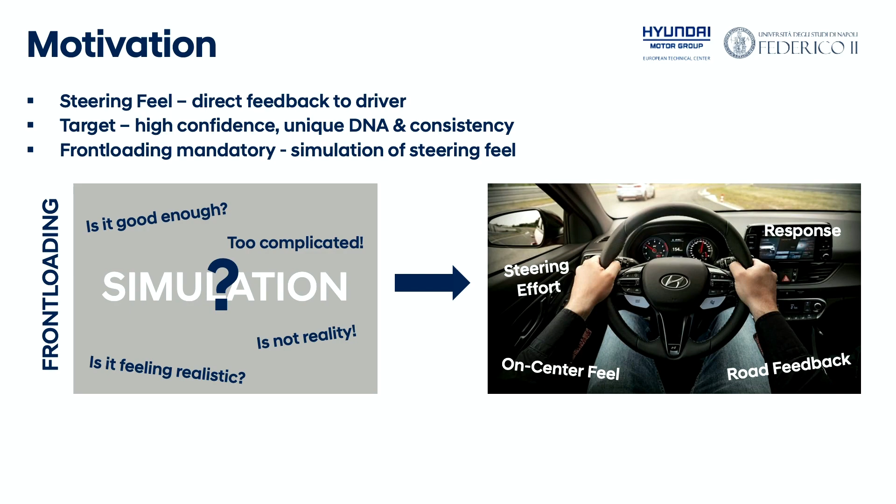Why use simulation? Well, we have been here for 2 days now, and we have heard about front-loading activities regarding tuning of the car, regarding suspension, kinematics, and compliance. Steering feel is definitely influenced by that, and therefore is something that is done at the very late stage of the development process. Now, in Hyundai, we are doing already what I said, and we wanted now to front-load this activity as well. The problem is that not so many people believe in simulation, and especially on steering feel, this is quite complicated. And therefore, our research question: how can we represent the steering feel in the virtual environment using a model in the loop approach?

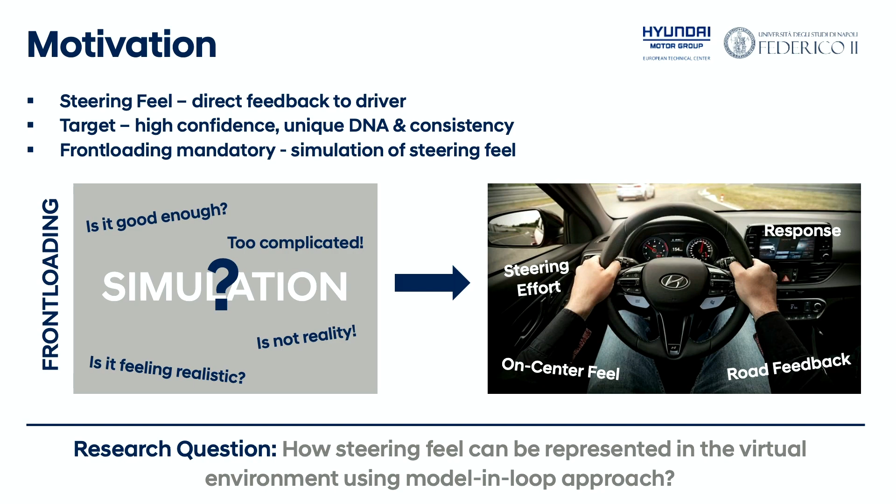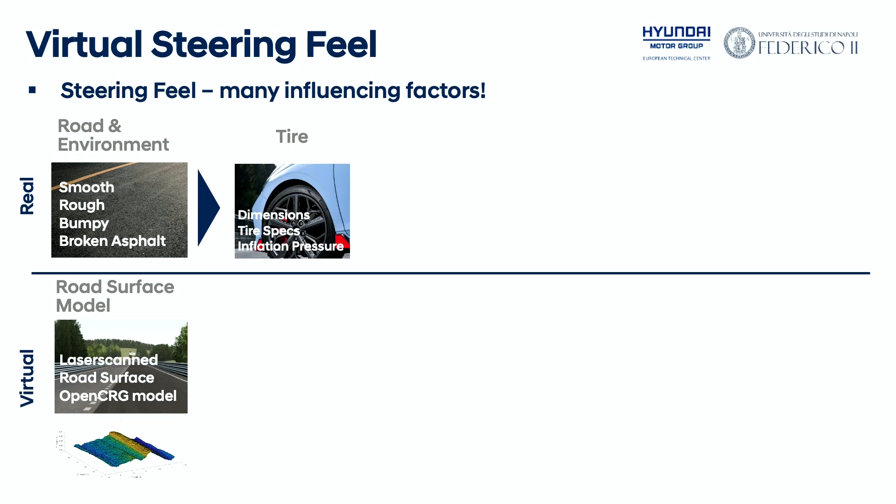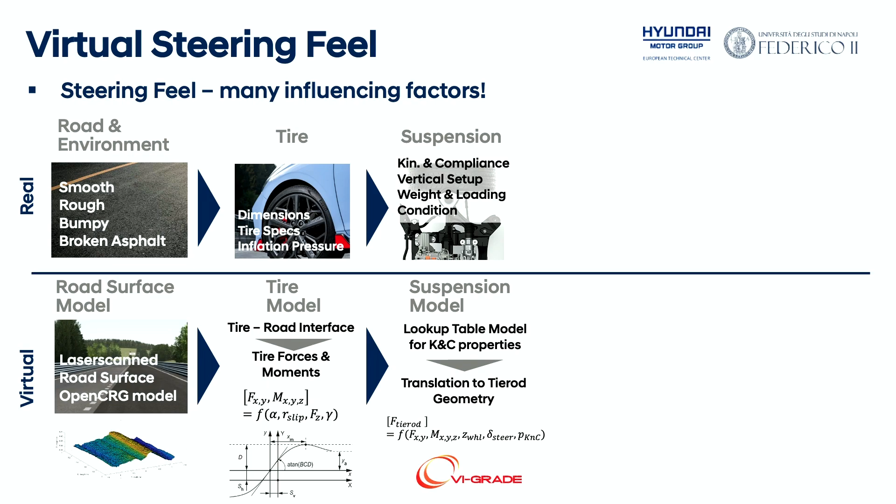Now, virtual steering feel. We have many influencing factors in the real world and in the virtual world. We have the road, of course, which can be different, smooth, rough, and in the virtual world, we usually laser scan in order to have an exact representation of them. Then we have the tire, different dimensions, different tire specs during the development process, and usually we have different tire models as well. Suspension, as I said, is already influencing the steering feel quite massively, and for vehicle models like VI-CarRealTime, we have lookup tables for the K and C properties.

Then we have the steering system, very high stiffness, very low damping, and definitely one of the few components that always has a control, at least here in Europe, which is the EPS. And then regarding the steering model, we have quite a complicated model. Usually, it's multi-degrees of freedom, and the EPS is represented only by the assist curve.

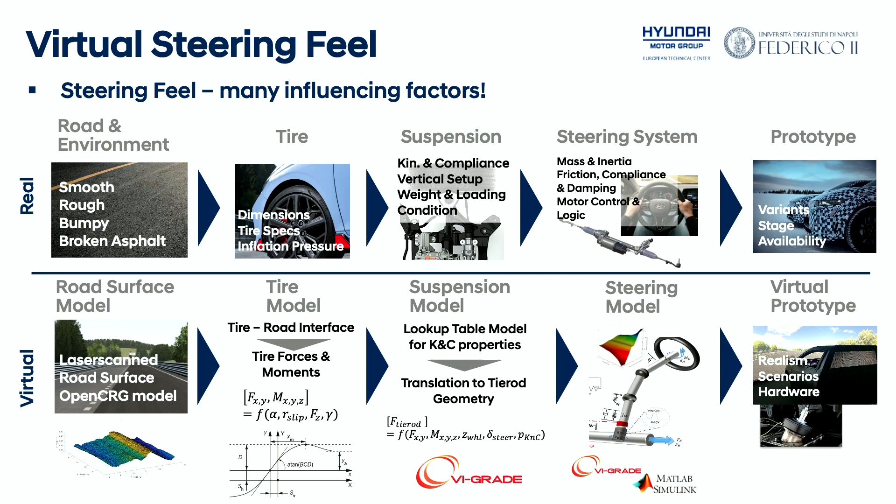Then the prototypes, not always available, in different variants at different stages, and our virtual prototypes that instead are always available. But then what is important is to give a realistic scenario and hardware that can give a correct feedback to the driver as well. And talking about the virtual testing environment, when we do subjective evaluation in HMETC, we use our static driving simulator.

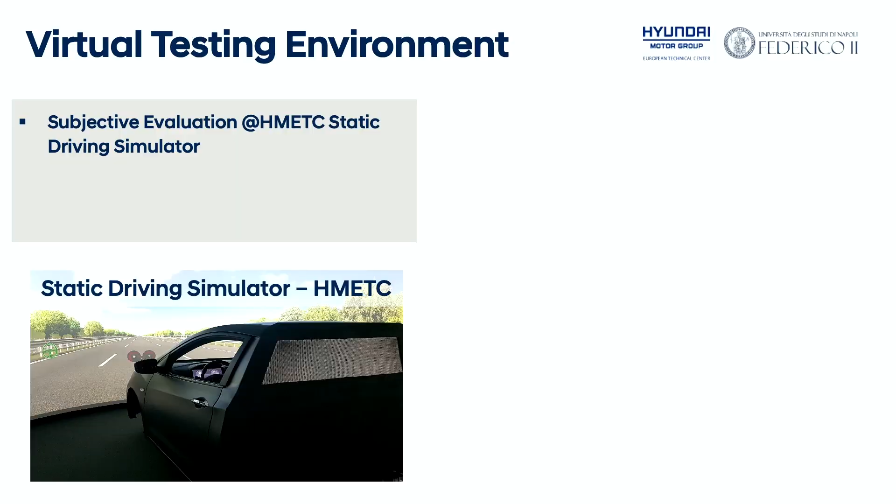The steering feedback loop: we have a hardware and a virtual part. The hardware is real, and we have the OE steering wheel and column, and we have the feedback torque actuator connected to the lower column connection to give the feedback torque that the driver should experience.

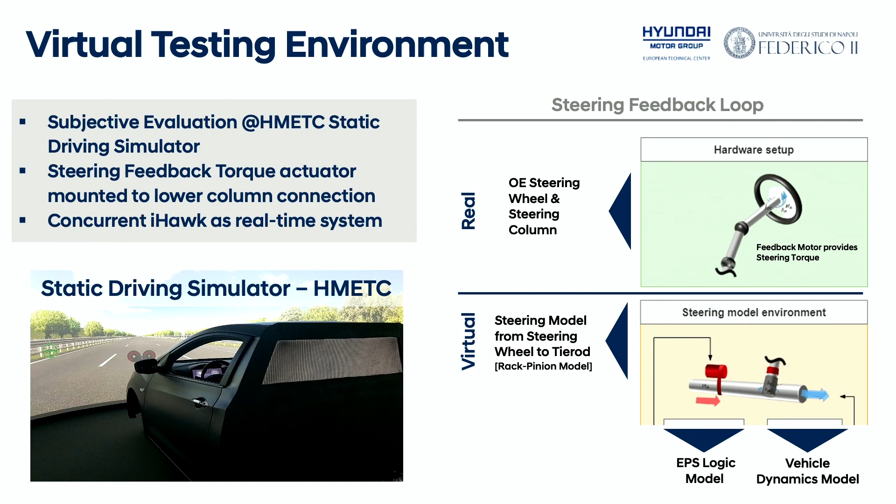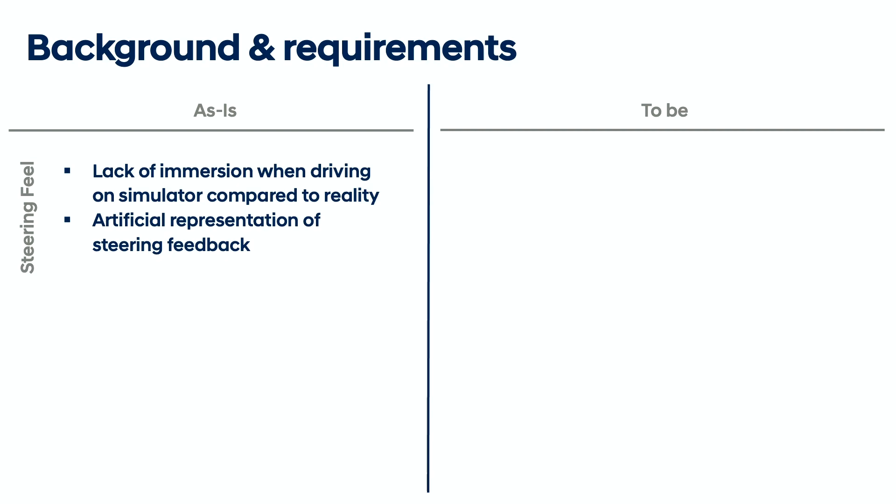I'm Francesco, and I will show you my work that I did with HYUNDAI on the EPS logic development. I will start by showing you the requirements and the background I found in HYUNDAI when I started working with them. The first thing is that there was a lack of immersion when driving, caused by the artificial representation of the steering feedback that they had before.

So we had as a requirement an improvement, to have a better immersion, especially for the drivers when they had to do evaluation of each kind of vehicle dynamics maneuvers, both for handling and ride. So what we had before in terms of steering wheel, does it work? Yes.

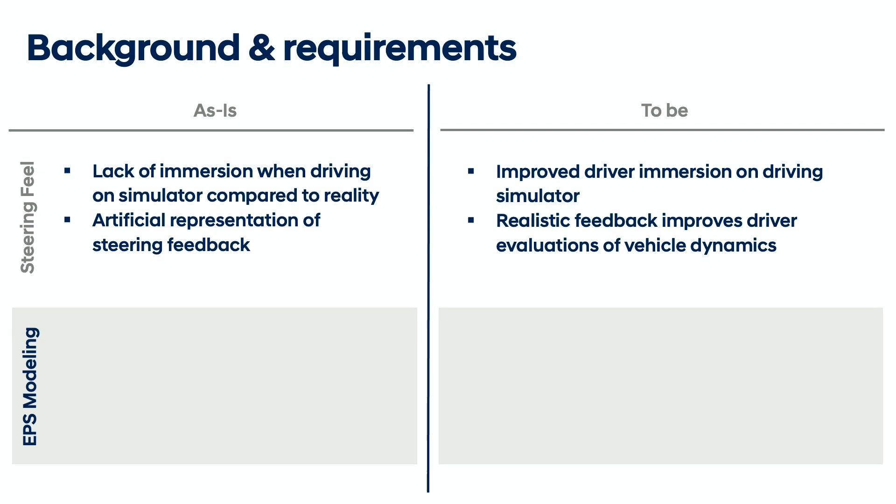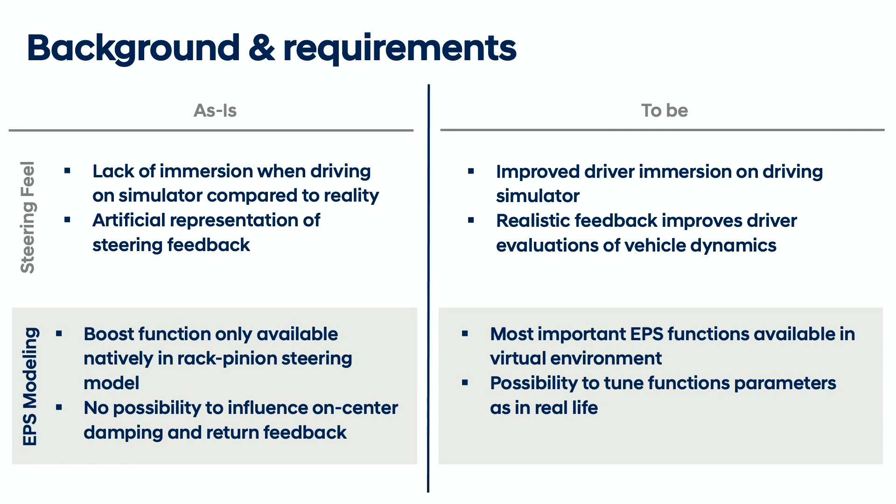What we wanted to achieve with my work was to have all the most important EPS functions you can find on real cars available in a virtual environment, with the possibility to tune them in the virtual environment. So we started from the simple lookup table, a simple assist function, and then we added other functions on top of that. The first one was the damping control function.

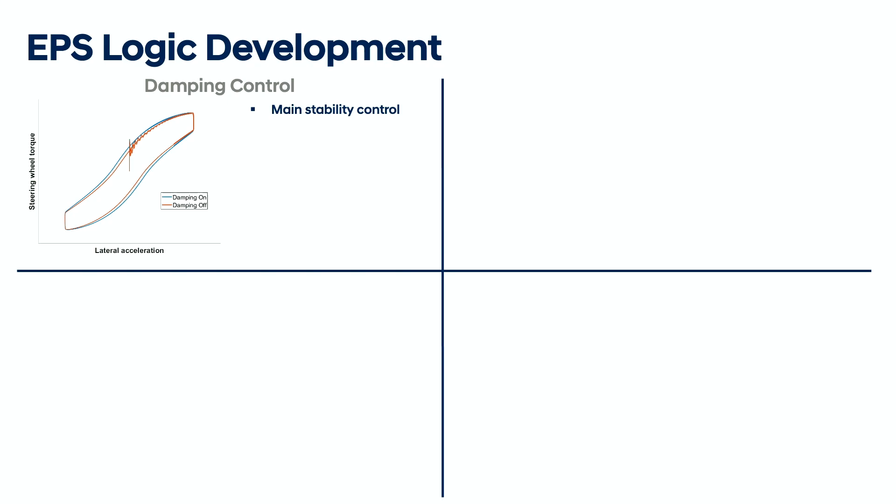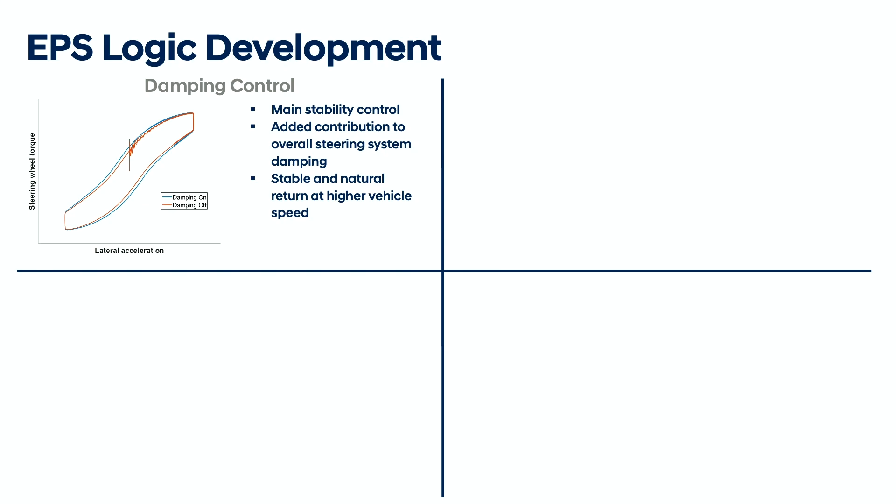That is the main way to stabilize the system without changing the damping of the system itself. Basically it just adds a contribution to the overall damping of the system. That also gives a better feeling to the driver when it comes to the return, especially at higher vehicle speeds. But the downside of having this function is that you have more hysteresis overall in the model.

For that reason, we have an on-center control function that improves the on-center by aiding the driver in the more dynamic maneuvers and by compensating the EPS motor inertia that is present in the mechanical model and the overall level of friction of the mechanical model. As I said before, it improves the on-center feel.

Then we have a very important function, the active return function, that is used for lower vehicle speeds to have the steering wheel return to the starting position. Without that, you can't have that at lower vehicle speed. And that improves a lot the immersion of the driver, because you feel like in a real car when you have this kind of function.

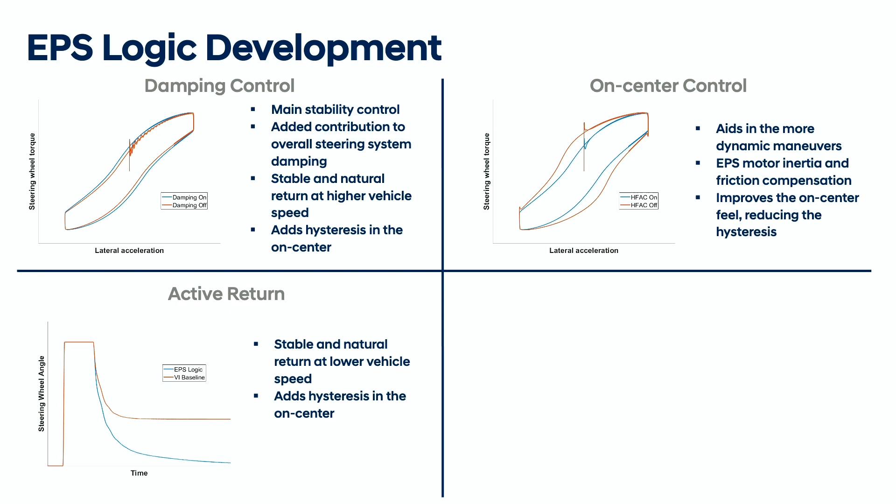But the downside of this function is also that it adds hysteresis in the on-center when driving at lower vehicle speeds. Overall, all the functions put together gave us a better representation of the steering feel compared to the measurement data, and with respect to what we had before with only the native VI implementation, as you can see in the graph.

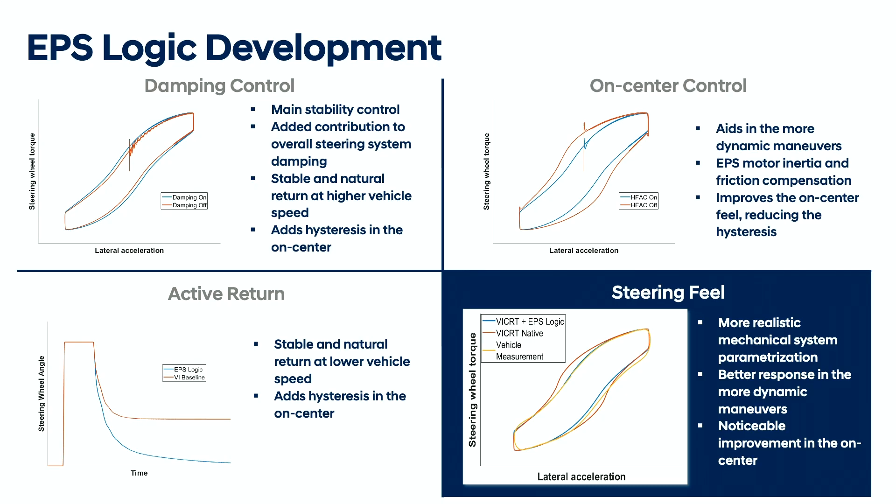That is due to the fact that we can also have a more realistic mechanical parameterization of the model, and we have a better response in the more dynamic maneuvers thanks to those functions. As you can see clearly from the graph, there's a very big improvement in the on-center characteristic of the steering feel.

A big challenge of my work was also the integration in the driver in the loop environment we have at HMETC. As Alessandro explained before, we have a Concurrent machine that runs with the classical SimWorkbench environment. The standard workflow to implement a Simulink model, because I did all my work in Simulink, is to use the ML toolkit to compile the model.

It's very simple. You can generate the source code from your model and then compile the source code into Linux, and then execute the executable that calls the library and have it interact with the VI-CarRealTime.

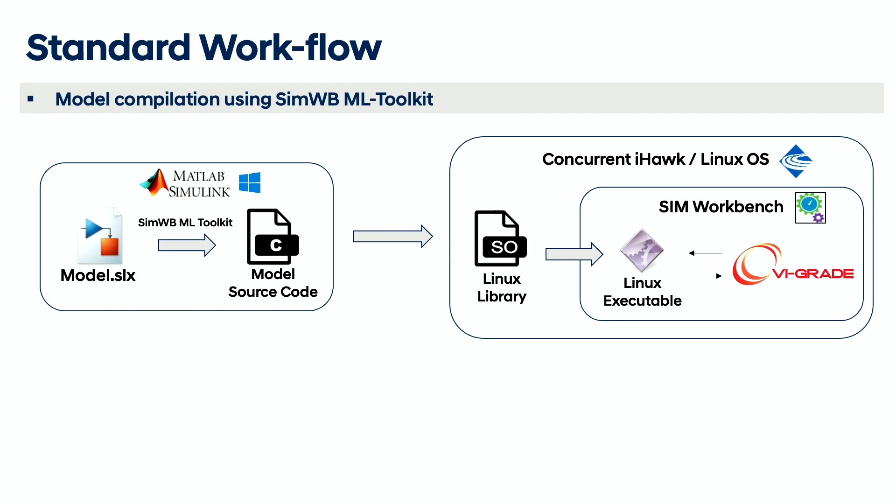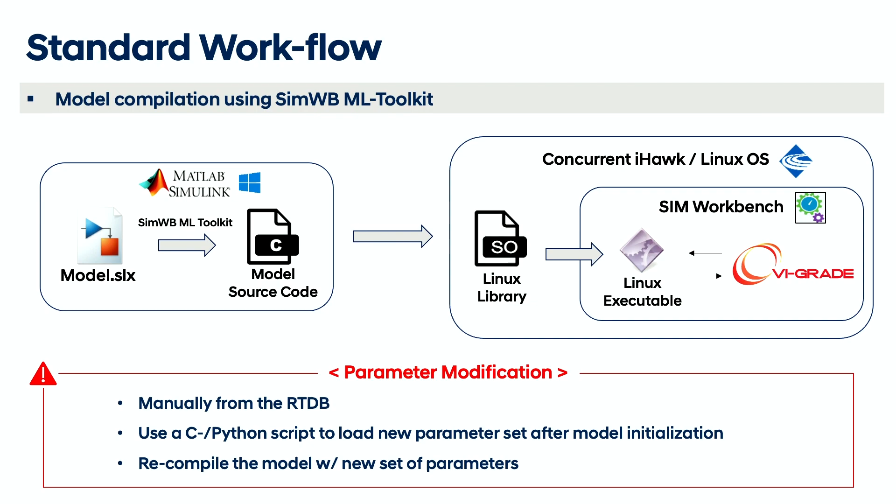But this procedure gives us some problems for all our use cases, because to modify the parameters, if you have different tuning files, with this workflow it's difficult to do. You have to change the parameters manually from the RTDB, or you have to code some scripts in C or in Python to do the parameter change, or you have to compile the model each time with different parameters, so it's not really feasible.

And we had to find other approaches to parameterize the system. The first one was to include an initialization function into the source code of the model.

So we did that by first obtaining with the ML toolkit the model source code. Then we obtained the source code for the initialization function, starting from a MATLAB function through the help of the MATLAB Coder. Then we put it all together, compiled the new library with the inclusion of the initialization function. And that library is able to call an ini file that contains all the parameters and all the settings you need to run the model.

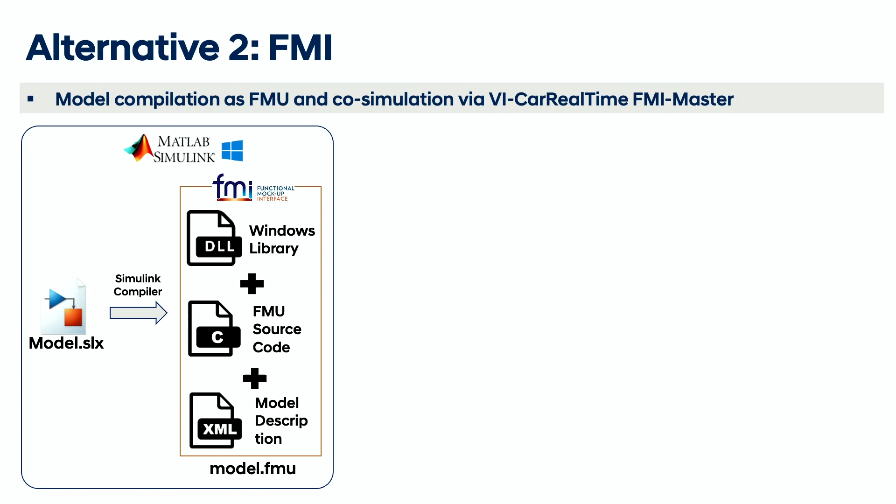And there's no need to recompile the model if you want to change some parameters. You just change them into the ini file, or change the ini file, and you can have new parameters. The other alternative is to use the functional mockup interface. So you compile the model as a Windows FMU at the start, but you have to include the source code for the FMU. Then you can use that source code to compile a new FMU into the Linux environment.

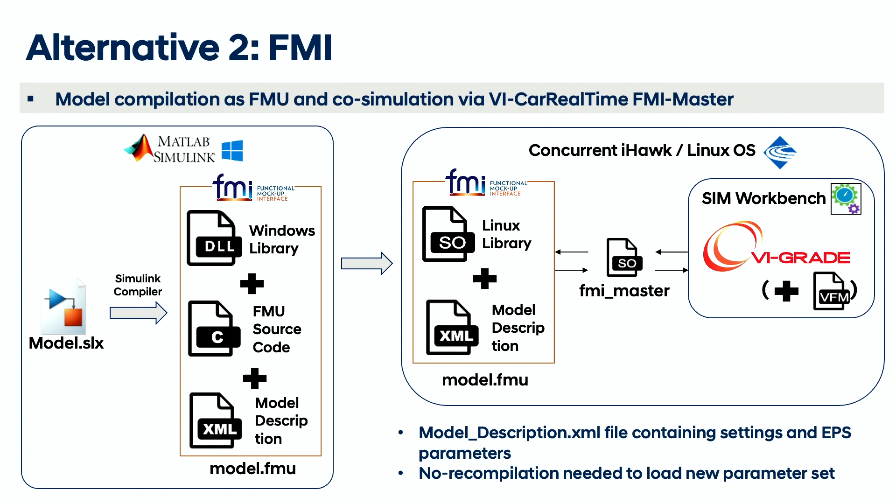And that FMU interacts with the FMI master library from VI-grade that is able to access in real time the model description file, where all the parameters are stored for the EPS logic. And so even with this approach, you don't need to recompile the FMU each time if you want to change the parameter. You just change the model description file.

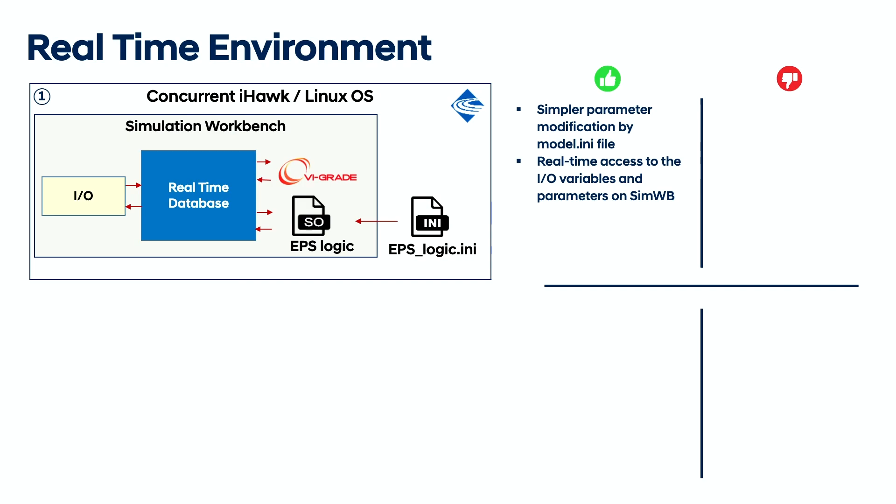So to compare quickly the two environments, to understand which method is better for each use case, we compare the final environments that the two approaches give us. So the first approach gives us this kind of environment where, as an upside, we have a simple way to change the parameters through the help of the ini file. And also, this way, we have real-time access to all the input-output variables and also all the parameters on SimWorkbench with the real-time database.

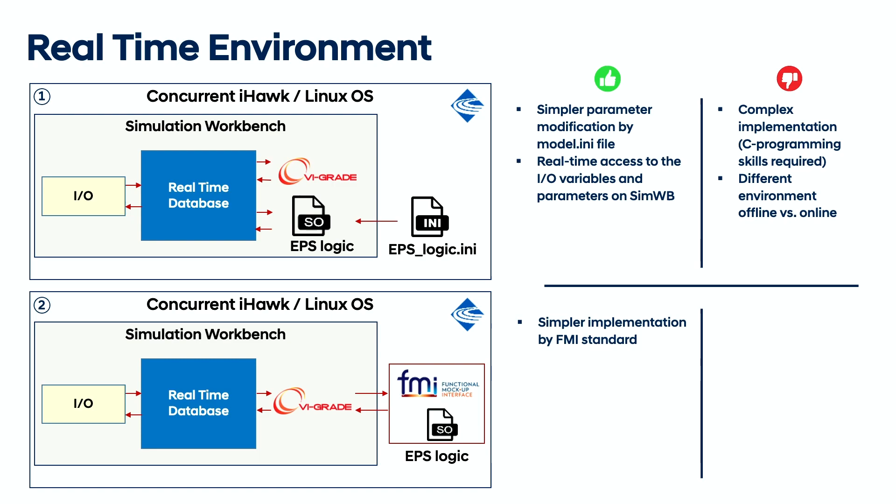But the problem of this approach is that it's more complex to implement. You need some programming skills to do that. And also, the environment you have is a bit different to the one you have with the offline simulation. With the other approach, the one with the FMI, you have a simpler implementation. You don't need to do much coding to implement the model this way.

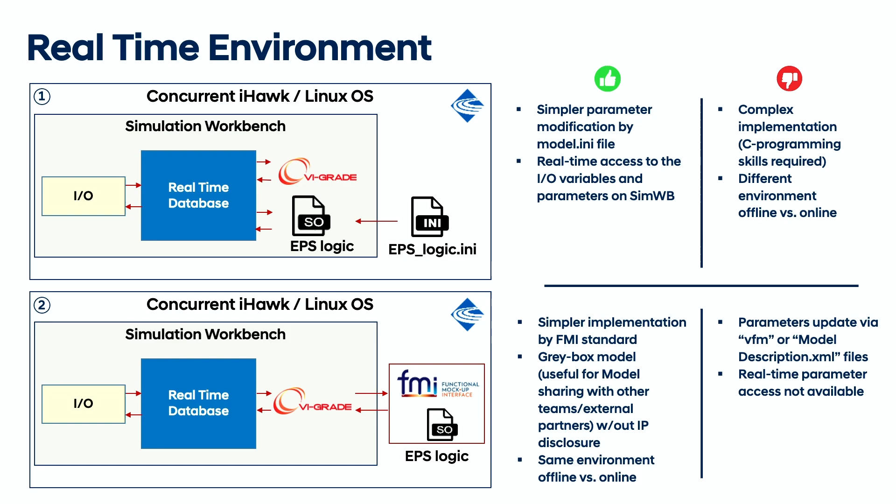And also, you have a gray box model at the end that you can share with external partners without problems of IP disclosure. And also, you have the same environment you run offline. You can replicate it one-to-one online. But the downside is that changing the parameters through the VFM or with the model description is a bit harder compared to the ini file. And also, you don't have full access to the parameters in the real-time database, because the FMI only talks with VI-CarRealTime, it's not included in the SimWorkbench environment.

and that gave us the feedback that this kind of logic can be used for steering tuning, and also to train new tuners to do their job, to learn how to tune this kind of logic. So for the conclusion, I will throw it back to Alessandro. Yeah, thanks, Francesco. Very good job. I will go quite quickly because we are running out of time.

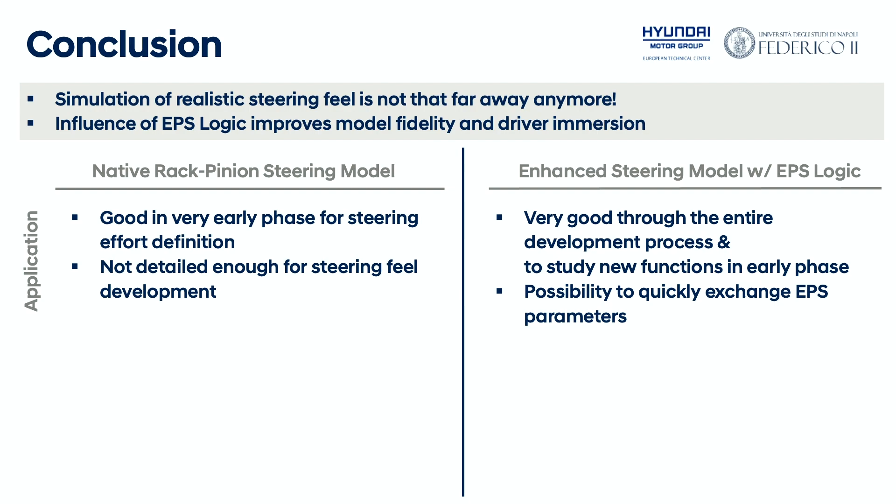So, steering feel development using simulation is not that far away anymore, and we have seen that having the EPS logic is massively improving driver immersion and their capability to evaluate the vehicle dynamics. In terms of application, the enhanced model with the EPS can be used through the entire development process, as it is an open model that we have developed in-house. And it's very nice because we can quickly exchange EPS parameters.

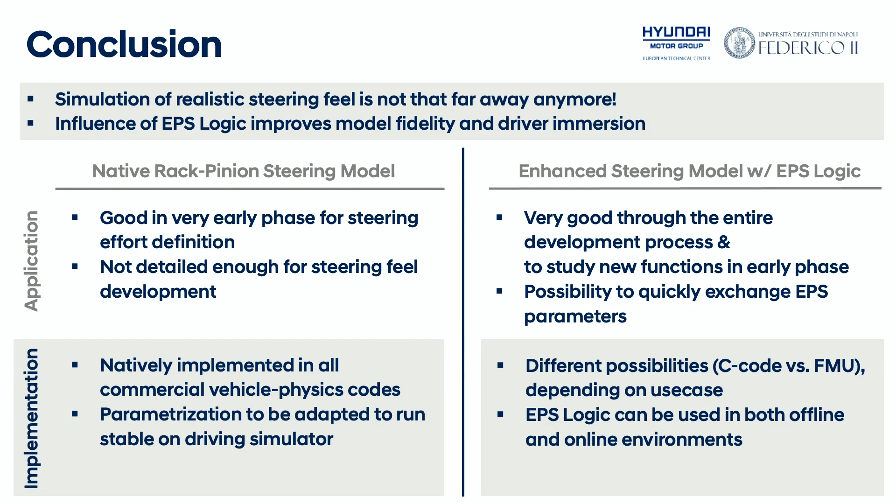Regarding the implementation, we have seen two different ways that we can use when we want to exchange models with, for example, suppliers. So we can tell them exactly how we would like to receive the model. And all the questions that we were asked before, is it good enough, is it complicated? Well, we can say that we can use simulation to do steering feel development, and from now on, this will be our standard environment for offline, but especially for driver-in-the-loop application.